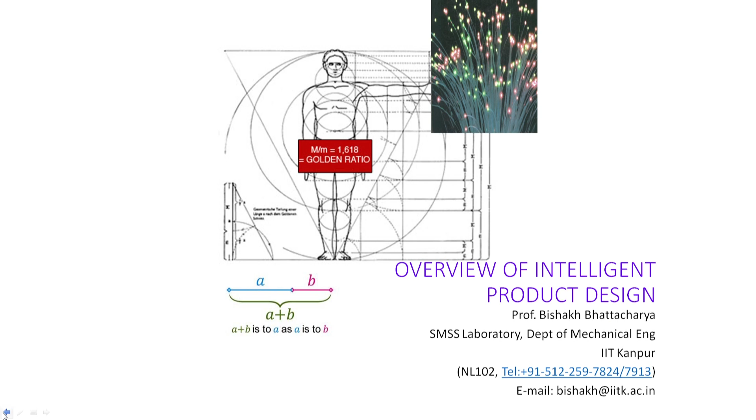Now, in this particular talk and a following talk also, we will give you some examples of such intelligent product design. Okay? And the very first in this direction will be in terms of a particular intelligent system called robots.

Okay? So, we had a dream long ago that animals, birds and human like creatures will be created by us just like God has created us, and these creatures will follow our directions as if we are their gods. This concept is there in humanity for a very long time.

Near about 350 before Christ, Archytas of Tarentum built an automatic dove. This is the sketch that is available today of this automatic dove that can flap in the air and perch from place to place. Though we do not know whether he was successful or not, the design looks feasible, and the only question is how did he power it?

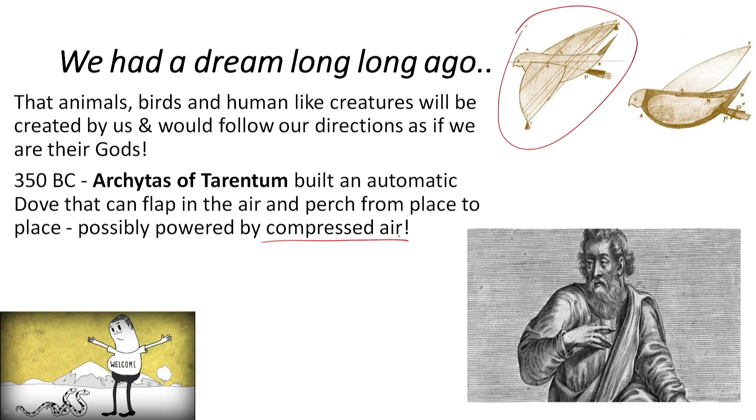We guess that possibly it was powered by compressed air. Compressed air, we should not underestimate the power of it. I will later on talk about at least one system that we are designing today out of compressed air. So, this was more or less the dream of the people in the beginning.

Now, it took more than 1000 years to come to some sort of a realistic situation, where around 1495 Leonardo da Vinci exhibited the first mechanical humanoid robot based on cables, pulleys and gears. You can see what goes inside.

So, you can see the cables here and you can see the pulleys here. These things are important for us. Keep in mind, we will be later on using all these things, and also we have some sort of a geared system maybe here. Okay. So, all these things together, what would this system be able to do?

Well, it would be able to sit and stand, it would be able to lift its helmet partly, and if needed it would be able to beat the drums. So, clearly Da Vinci had in his mind both entertainment as well as defense. So, that was this sort of system.

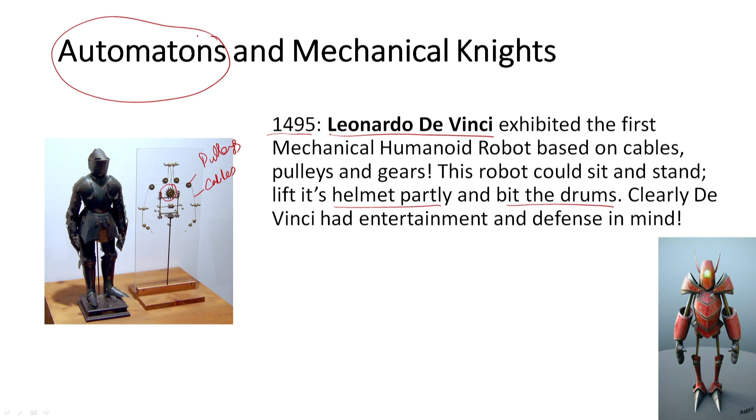Then people started to give a name to it. It is called automaton. An automaton is a system which is mechanically programmed, and depending on that program, it can do a particular fixed type of movement of some limbs or do some kind of work, but the entire thing was 100% mechanical.

Now, the beginning of the 18th century saw the pinnacle, the peak of this mechanical design, because that was the time when persons like Vaucanson had been able to design a fully functional flute player, and even a very interesting duck, very famous as Vaucanson's duck, because this automaton is completely bio inspired.

She could splash in a pool, she could flap her wings, and if you feed this duck some grains, it will defecate in the form of silver pellets. So, this was clearly for entertainment. Now, of course, the field did not remain limited to entertainment.

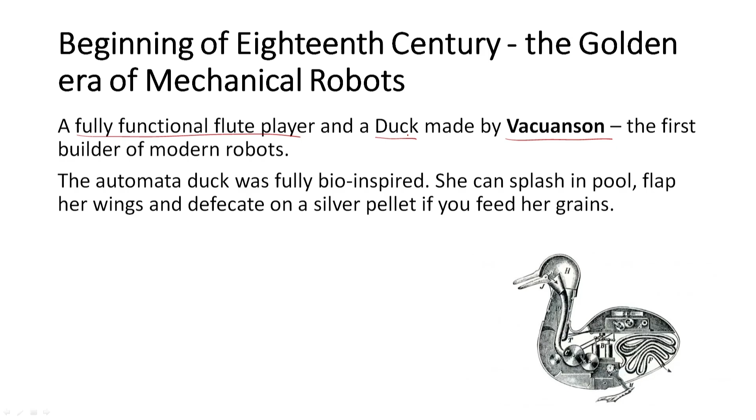For industrial usage, we have to jump now from toys and entertainment to manufacturing, but that took maybe around 70 to 80 more years, and by 1950, as automation steadily progressed with the progress of electric motors and generators,

we started getting newer types of manipulators. Joseph Engelberger, whom we call the father of modern robots, developed the robot called Unimate for General Motors. Unimate was used by General Motors, Nokia and Kawasaki as a manufacturing aid. The GM robot could weld and assemble cars at the rate of 110 cars per hour.

A great achievement. Imagine how many human beings would be required to assemble 110 cars per hour. So, it could save a lot of manpower. Not only that, this hand later on could also play golf, pour beer and conduct an orchestra.

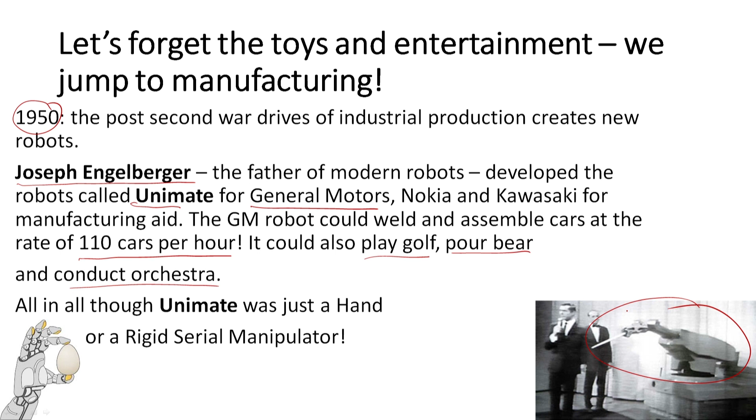So, all through simple hand-like manipulators, and this is nothing but an example of a rigid serial manipulator system. Now, from there we go to 1972, to Waseda University. This university in Japan is credited with building the world's first modern humanoid robot, and it is called Wabot-2. This robot could walk and communicate with people in Japanese, pick objects from one place and keep them in another place. Later, it also could read and play music.

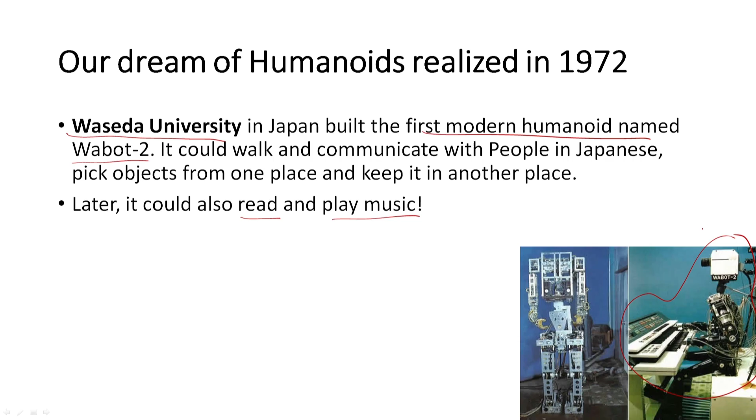So, that is the Wabot-2 robot, as you can see, playing music. So, this was steadily our improvement towards the development of more and more intelligent systems. In that direction, of course, Wabot-2 was not very anthropomorphic, which means it was not very human-like. A more human-like product was Asimo, and Asimo actually means literally dancing humanoid. Honda introduced this robot, and it is famous for its mobility. Asimo can jump the stairs, dance and avoid all obstacles in its path.

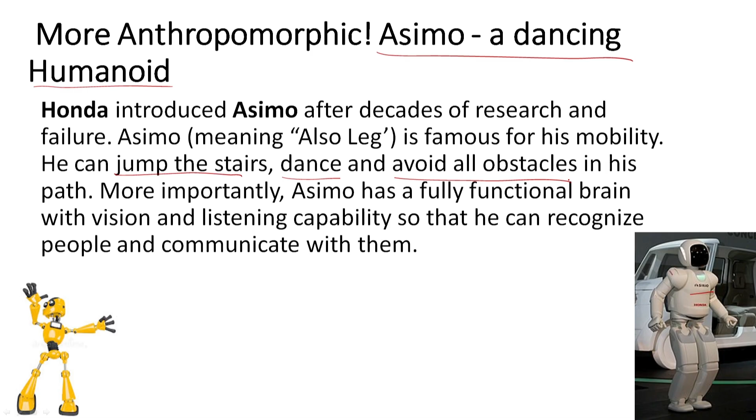More importantly, Asimo has a fully functional brain with vision and listening capability, so that it can recognize people and communicate with them. Now, 2006, if we go fast forward, we get a wonderful intelligent system, a robot called NAO, which is a generic humanoid which even you can program. We program it in our laboratory. So, Aldebaran Robotics created this NAO robot, which is a programmable humanoid robot used for research, and now for the first time computers have a body.

You can program NAO to walk, talk, perform any complex movements. NAO has 25 degrees of freedom, and compare it with us, it is about 40 degrees of freedom. So, you can say that it is quite versatile in terms of its movement, and today it is available in many countries, helping researchers, helping autistic children and elderly people. So, this is the NAO. Okay. So, that is another development.

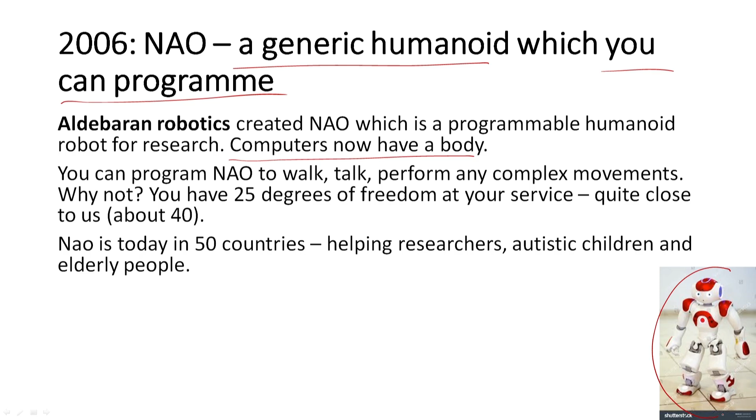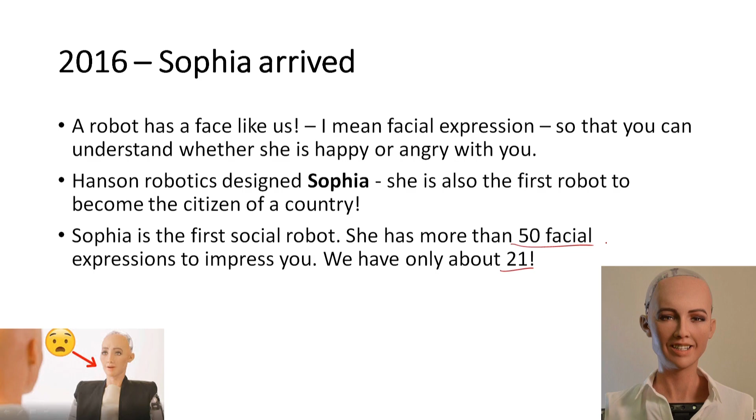2016, something more human-like appeared. This is Sophia. In fact, Sophia is the first robot who got citizenship of a country. Now, Sophia has much more facial expression than us. Possibly we have about 21 facial expressions, the muscles that move our face, whereas Sophia has about 50 facial expressions. So, that is how it is much more interactive in nature.

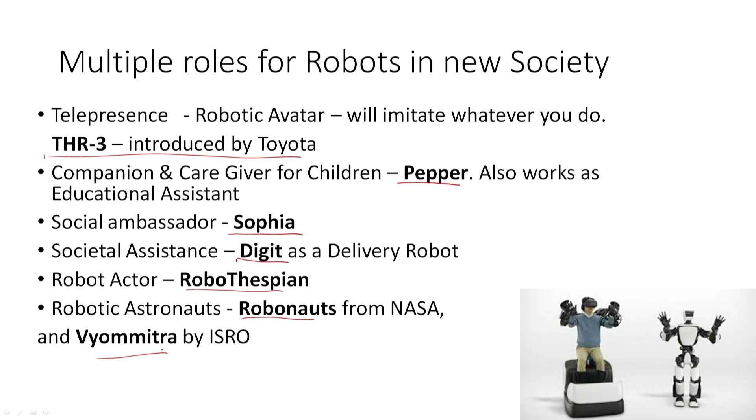Now, today there are multiple robots with multiple roles in our society, like this robotic avatar THR3, which is introduced by Toyota. It is used for telepresence. Then the companion and caregiver for children, a robot called Pepper. It also works as an education assistant. Social ambassador robot, I told you already, Sophia. Social assistants like Digit as a delivery robot. Then robot actor RoboThespian, robotic astronauts like Robonaut from NASA or Vyommitra by ISRO. So, there is a whole group of robots for different types of functionalities today.

Important thing for us to know is that robots are not the only intelligent autonomous system. IAS, keep the full form in mind, because it is related directly to our course: intelligent autonomous system. Okay. So, this is not the IAS that you know, not the Indian Administrative Service, but intelligent autonomous system. Now, in this category, robots are not the only thing. For example, all the unmanned air vehicles, unmanned ground vehicles, or underwater vehicles, they are all part of this IAS system. Hyperloop, I will show that example, is an autonomous transportation system.

Then there are Da Vinci-like surgical platforms, that is also an autonomous system. Then we have this autonomous tactical swarm system Atlas, which is used for defense purposes. Then we have the AI-driven Northrop Grumman X-47B, a completely autonomous aircraft for defense purposes. Play and companionship, such as Sony's Aibo, an autonomous robot dog, or Anki's Cozmo. And also we have AI in VR games, virtual reality games like Half-Life: Alyx.

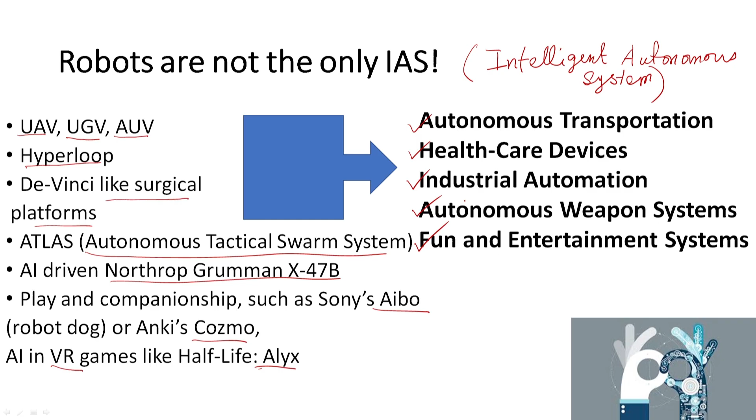So, today if you look at it, these intelligent systems are there in autonomous transportation, in healthcare devices, in industrial automation, of course, for manufacturing, then autonomous weapon systems for defense and offense, and also for fun and entertainment systems. So, there is a whole range of products where you will need this kind of intelligence to be embedded, and they all come under the gamut of intelligent autonomous systems. So, then the very relevant question for our course is: what is intelligence?

How do we define intelligence? Intelligence is the ability to act appropriately, that is important, to act appropriately in an uncertain environment. What is this appropriate action? Appropriate action is that which increases the probability of success. And what is success? Success is nothing but the achievement of behavioral goals.

So, the more you achieve the behavioral goals, the goals for which a product is designed, the more successful is the product. And the more successful it is, not only in an environment for which it is generally designed, but in an environment which is uncertain.

Like I have this watch here, and I know it is designed to work inside this room or in a normal condition, but if I go deep inside a swimming pool, it is not designed for that environment, it is a new environment. So, in such an uncertain environment, if it is still working when I come out, that means this watch is intelligent. So, like that you have to design systems which can keep themselves ready for any uncertain environment.

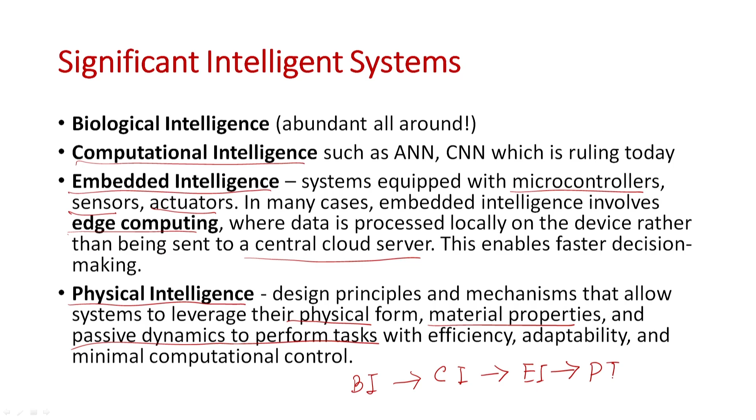Remember in the last class I talked about a passive walking robot designed at Stanford. This one has physical intelligence, because it can take leverage from its physical form, from material properties and passive dynamics to perform tasks with efficiency, adaptability and minimum computational control, so that you actually reduce the computational part. This is the goal towards which we are progressing. There was a time when there was only BI, today we are in CI, from CI we will go to EI, and from EI we are rapidly going towards futuristic PI, physical intelligence.

Now, I will give you some examples of such systems, okay. Particularly I will go up to EI systems. So, one such system that has been developed in our laboratory is called autonomous robot for crop monitoring and localized pest neutralization. So, what does it mean? It means you can see here that these are basically potato fields. Okay. So, these are potato fields in which we have this autonomous robot.

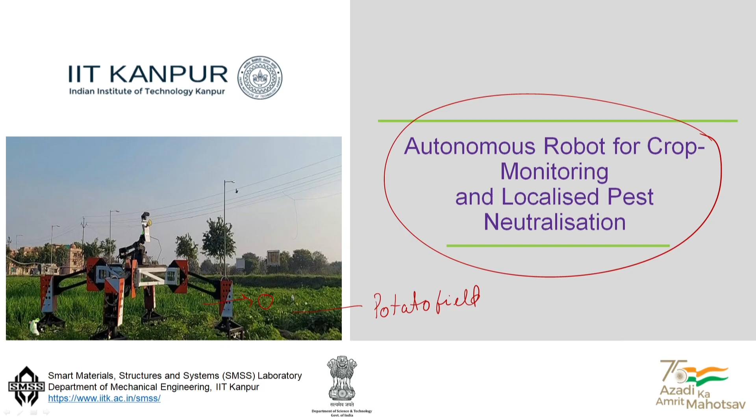What it does is that it monitors the health of these potato plants, and also it finds out that, let us say, there is a specific region where some kind of a pest has appeared. So, you should not apply the pesticides all over the field, because pesticides are carcinogenic. So, it will look into it with its cameras, the robot will travel there and apply the pesticide specifically at that particular point. So, that is the way this system is going to work.

So, you can see here how this system is developed. Okay. So, it has a chassis, for example, which has all these manipulator type of things, and then it has an adjustable arm configuration, so that with the soil up and down, it has that physical intelligence to take care of it. It has suspension mounts, so that the vibrations would not affect it, and then it has the robotic arms attached here that can apply this particular type of pesticides.

So, the range of such a system is designed in a way that it does not go a long distance, but up to 5 km with a speed of about 3 km per hour, with a lithium ion battery system. Temperature range is 20 to 45 degrees. So, it is not a very uncertain environment, and 80 kg is the weight of the system, and it is equipped with cameras like the Intel RealSense depth camera. It has Wi-Fi communication and robot operating system.

And you can see here that it has acquired the knowledge of different types of diseases of a potato field, like potato early blight, potato late blight, and tomato field also, tomato early blight, tomato late blight. It has understood them, and then it works in all these different types of fields and applies the pesticides. So, let me see if I can show you some of these videos at this point. Okay, so in a few of these videos you would be able to see how it is moving and applying such pesticides.

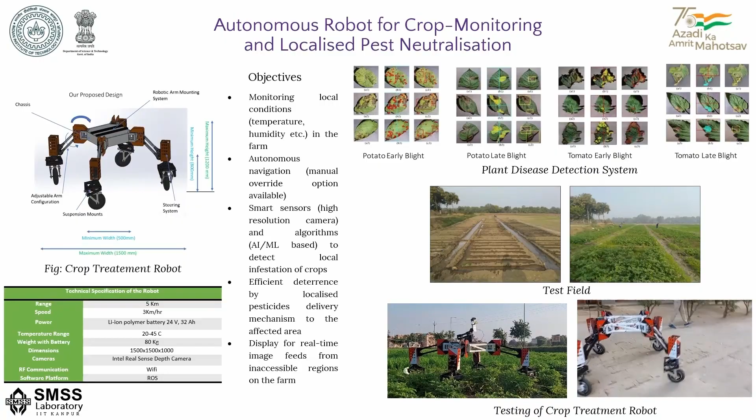Now, I will come to the other variants of such a system. Another variant is the plant disease investigator, and it works on the field itself, closer to the ground. So, it has a different type of movement system, a belt driven system, and its major role is to identify these diseases that I have talked about.

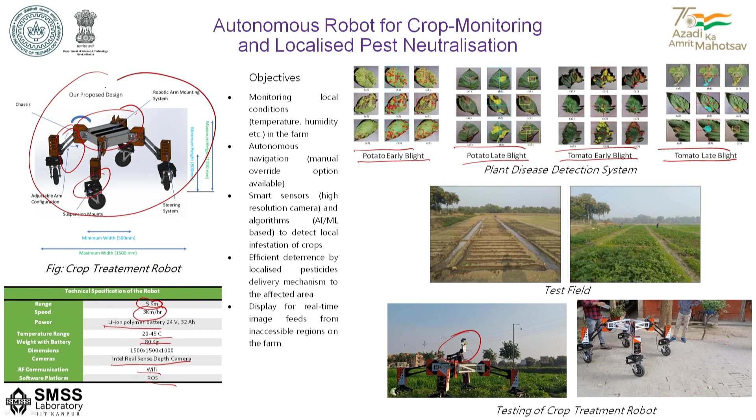For all these diseases, it takes photographs, tries to identify them, and feeds that knowledge into the main robot. So, the main robot has to work in tandem with this type of smaller robot which works closer to the ground, because otherwise you will not get such information. And also there is an environmental observator that moves along these lines all over the field and gets different types of data.

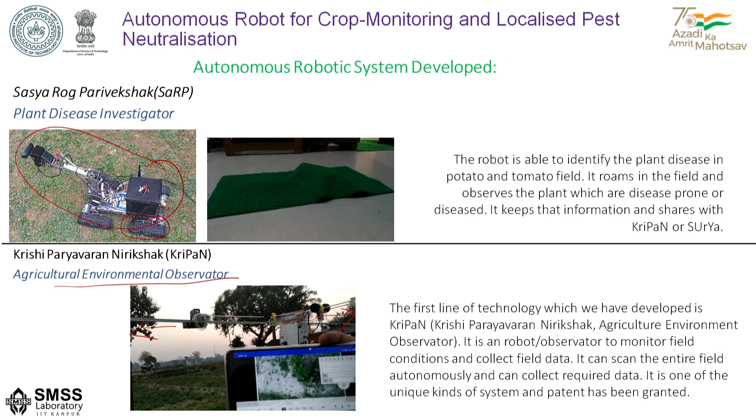I will show you what type of data we can record in such a system. So, you can record data like light intensity, air temperature, air moisture, soil temperature, soil moisture, as well as visual images. So, these multiple parameters at different conditions you have to acquire. So, you have to have a multimodal data acquisition system in order to have the embedded intelligence in such a system.

So, this is one such example of a project that we have done, which was sponsored by the Department of Science and Technology, okay, at IIT Kanpur. Now, I will talk about another embedded intelligence system.

This is the design and development of a substation inspection robot. You can see here this works in an electrical substation unit, and here you can see the design of the robot, which is based on a rocker bogie mechanism. You can see the pan tilt mechanism here for the camera, the thermal camera, the RGB visual camera unit.

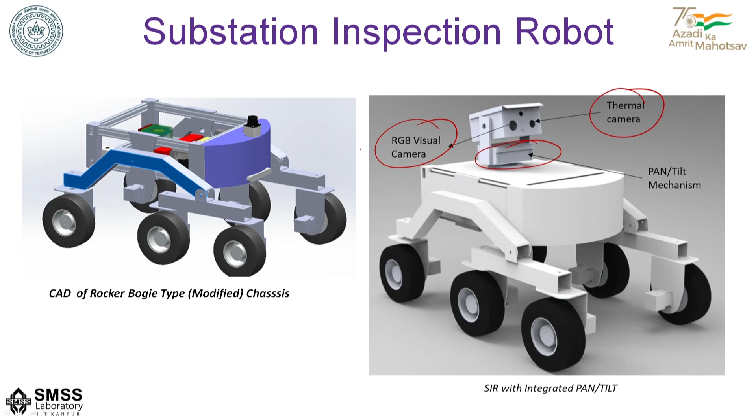So, multiple sensors will be needed for its movement, and with these you can see that this is the prototype of the system in which the driving power is coming from the motors, and it has additional systems like an emergency stop system. Then it has the MCB corresponding to it.

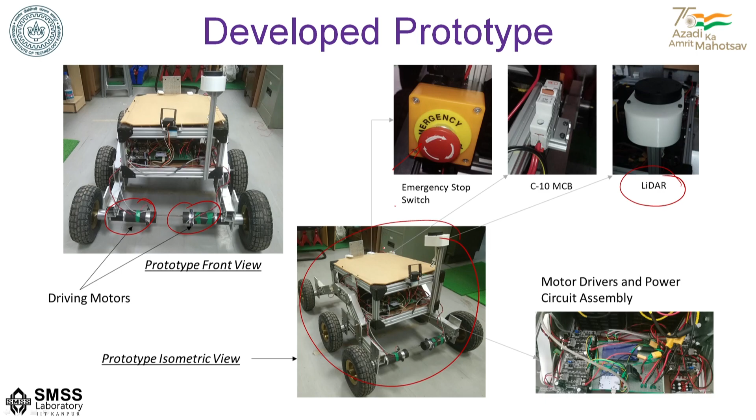It has a LiDAR system which actually tells it about the path and the obstructions ahead, and this is the prototype isometric view of such a system that we have developed along with the motor drivers and the power circuit assembly. So, once you have all these sensors in it like thermal camera, pan tilt zoom camera,

and then the ZED stereo cam. Thermal camera is required because you need to know in a substation if there is electric insulation failing, then there will be hot spots. So, you need to know about the hot spots, the thermal camera is going to record it. Pan tilt zoom camera is going to record the different types of dial gauges or different types of areas of failure. Stereo cam is going to record the path, and LiDAR also is going to record the obstacles present in the path, and you also have the microprocessor.

This is the brain of the system, which is an NVIDIA Orin system. So, all these systems together create an example of an embedded intelligence. So, you can see that it is in a rocker bogie action against some obstacles like these, and gravel track work, rocker bogie actions, all these different types you are able to see in the test run.

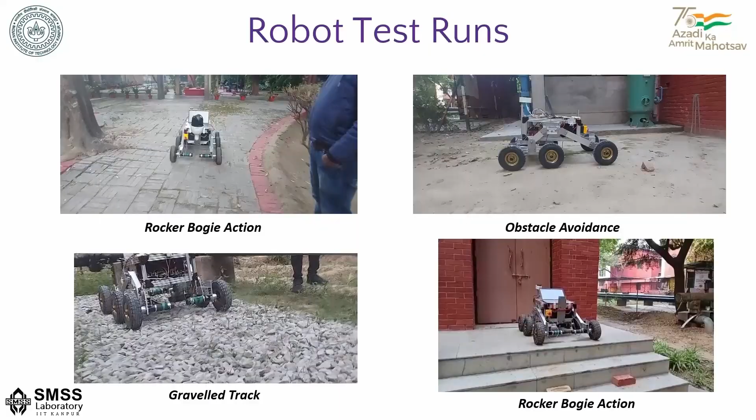Now, one of the intelligence that this system is having is actually object and gauge detection. So, using artificial intelligence and machine learning, it first of all detects wherever the gauges are, and if there is a gauge there, like let us say this is a gauge, it identifies the type of the gauge, and differentiates between gauge 1, gauge 2, etc. And then converts this reading, the reading that you can see here, into a digital reading. Okay. So, that is the purpose of it.

So, it trained itself using many images, close to 5,000 images, and then it is able to detect the objects, detect the gauge, and determine the readings of these analog gauges, and then transfer them into digital data. So, that is the function that it has to work on.

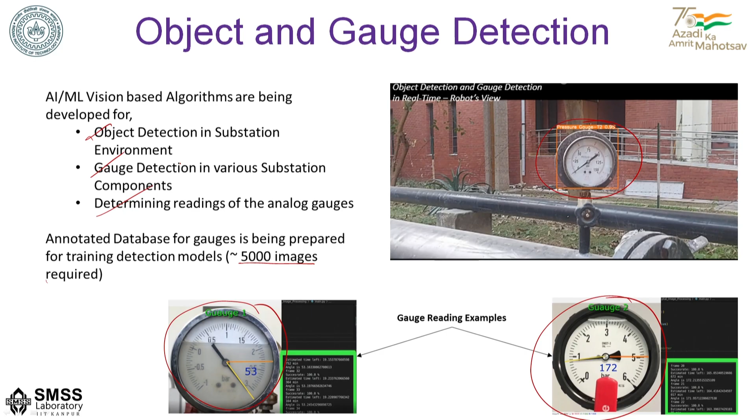Now, I come to the point that these are some of the things that have been already done today. Okay. In this course, we will be precisely able to know how you will be doing such a thing, and how the future intelligent autonomous system will be built. So, in order to know that, you have to first see what goes in an ASIMO robot.

Like the Honda engineers created the ASIMO robot, which has 34 degrees of freedom that help it walk and perform tasks much like a human being, and by using lightweight materials like a magnesium alloy structure combined with powerful computers and 34 servo motors throughout its body, it helps the ASIMO to move very smoothly.

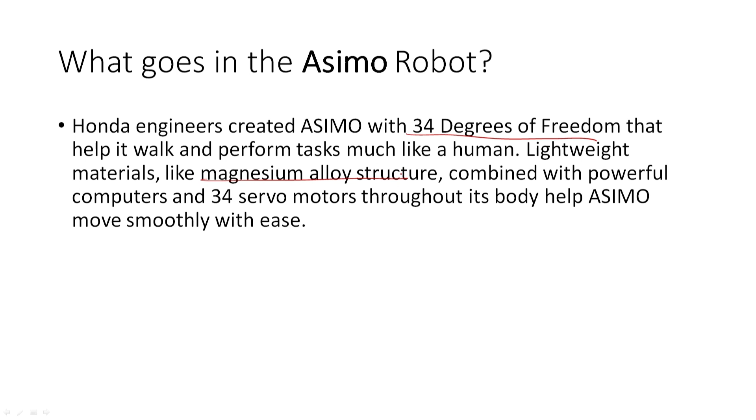However, if you look at the specification of ASIMO, you will understand what its energy efficiency is. It is about 3.23, that is the energetic cost of transport. Compare it with us, which is 0.20, and that famous Cornell biped, which was very passive and of course did not have this kind of functionality, was also very close, at 0.20.

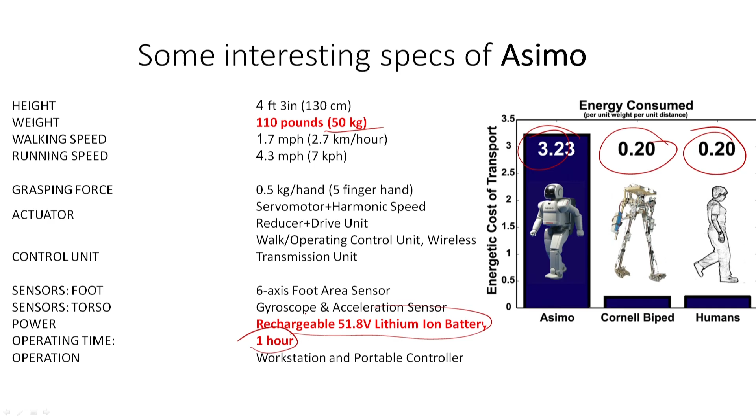But ASIMO, with all the advanced functionalities like us, is a terrible failure in terms of energy efficiency or efficient utilization of energy, because with its 50 kg weight, it can only run for about 1 hour with a rechargeable 51.8 volt lithium ion battery. So, that is something that we need to avoid in tomorrow's systems. How do we do it? How to make IAS energy efficient?

Well, one important thing, as I told you in the beginning, is that the days of purely computational intelligence are really numbered, because you have terrible computational cost, the weight of the computer, and then the cooling that you have to give. So, part of the computation has to be morphological computation. That means the structures and materials will do some of the tasks on their own, which will make life much easier. Okay? I can give you a simple example of it.

See, when we walk on any terrain, you really do not always need to watch where you are walking. Your feet themselves know that this is a new surface, and accordingly adjust the spread of the toes, etc., so that essentially you save yourself from those computational tasks. Unless that area is very, very slippery, so that you know you have to change your configuration from two limbs to four, I mean hands and legs together; if you take such cases apart, in most usual cases it is morphological computation that saves us from computational burden.

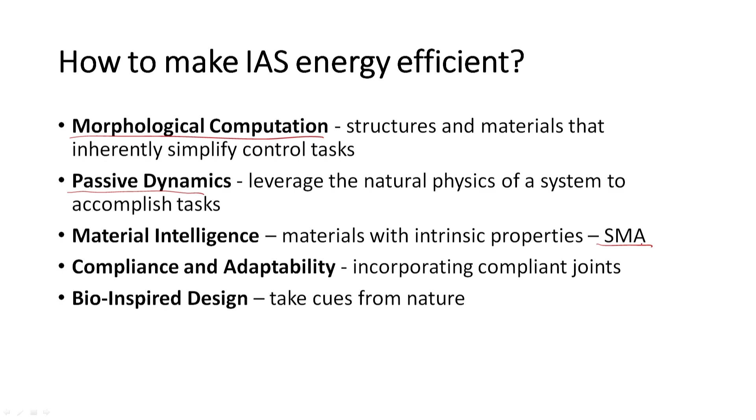And then passive dynamics, as I told you, leverages the natural physics of a system; material intelligence uses smart materials, materials with intrinsic properties like shape memory alloy; compliance and adaptability, so that you can incorporate compliant joints in the system; and bio-inspired design above everything, that is, take cues, take ideas from nature and implement them in a system. That is what will make the system cost efficient.

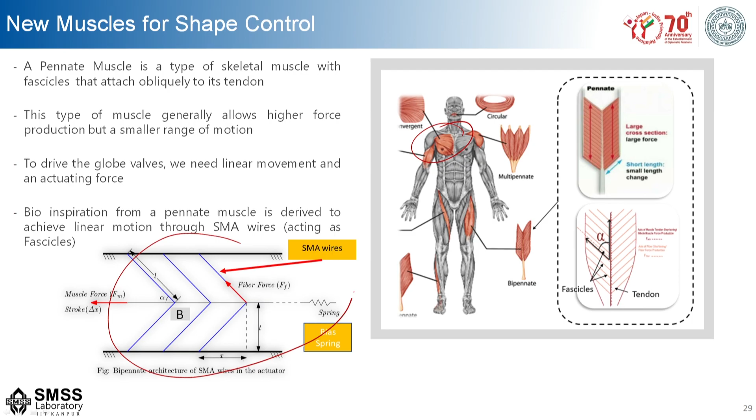Some examples of such a system, which I will talk about in much more detail in the course, are these muscles that can be simulated using shape memory alloy wires. We have developed it for exosuits and exoskeleton types of work, where you can get a tremendous amount of weight savings if you use this technology.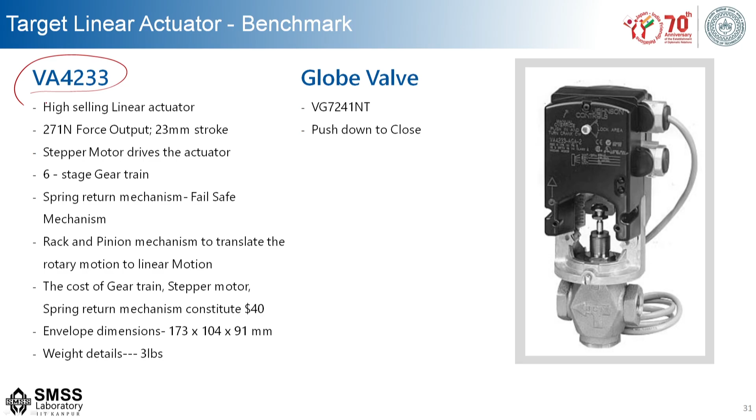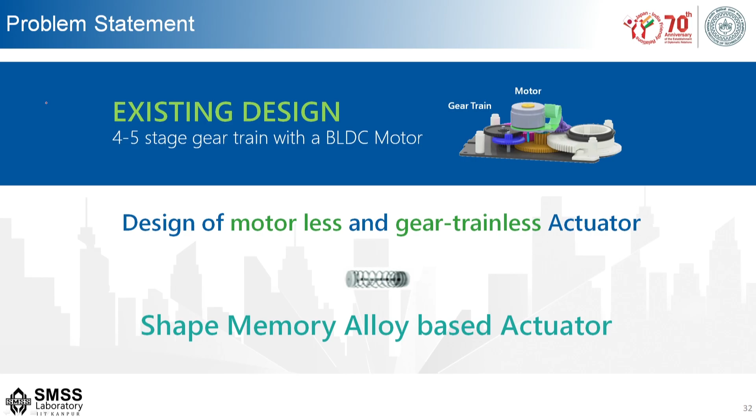This is a case where we have used this and compared it with a particular type of actuator called VA4233. This was the existing design, and it becomes a motorless and gear-trainless actuator if I use the SMA, which is bio-inspired. I will talk about the SMA details later on, like what actually gives this property to the SMA. I am just giving you the overview of it.

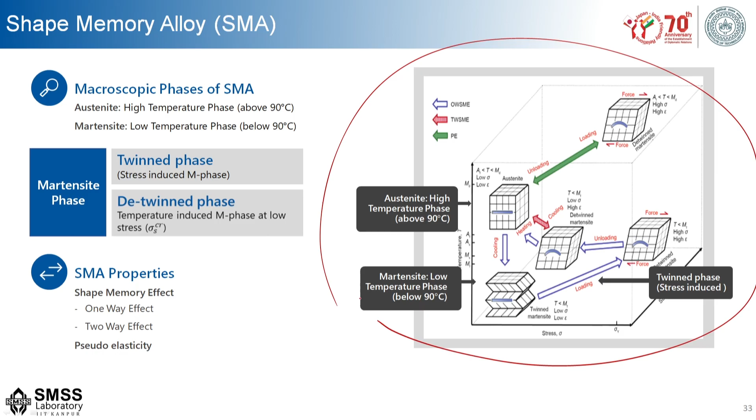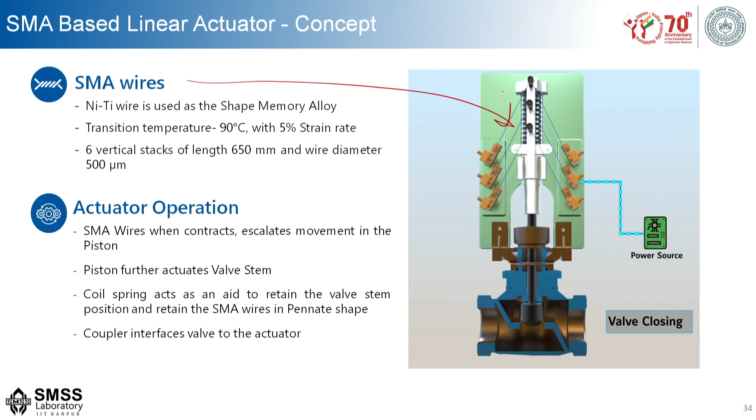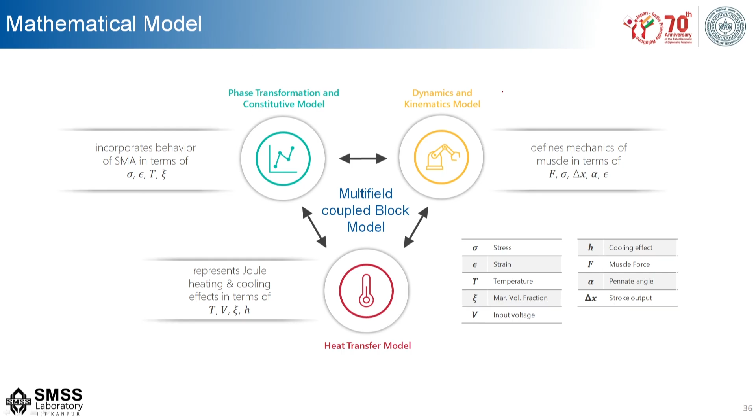We have used such SMA wires in this bipennate configuration as an actuator, and you can see this is the bipennate actuator configuration, in which we have utilized such a system first in 2D, which involves many different types of fields that have to work together to create this action. And then this is a complete three-dimensional system in which we have the bipennate actuation.

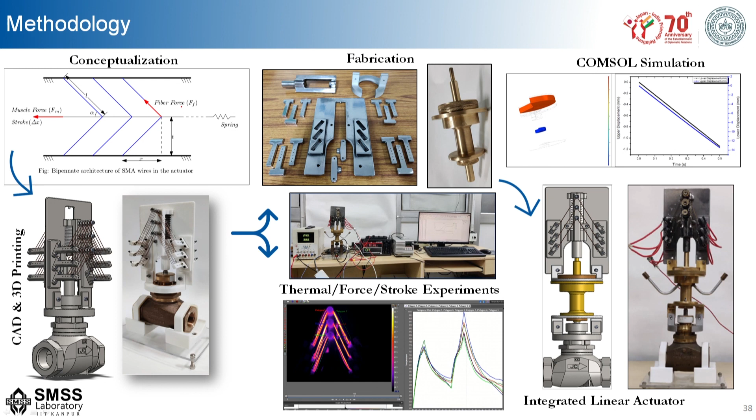You see the conceptual visualization of the system to give you an idea of what an intelligent system is, and there is a video there that you would be able to see, and this is how this actuator is moving, with a force greater than 200 Newtons.

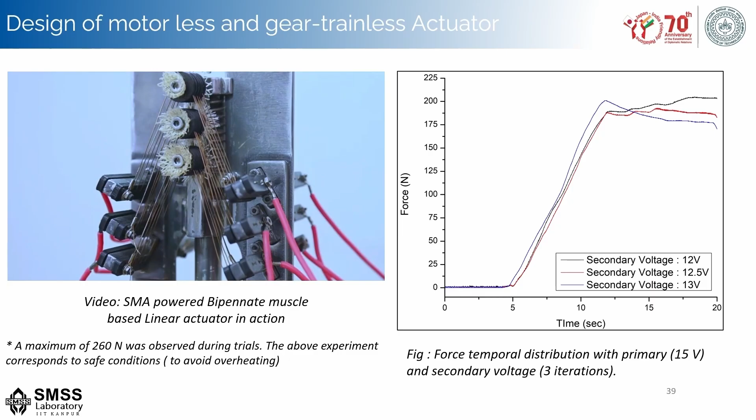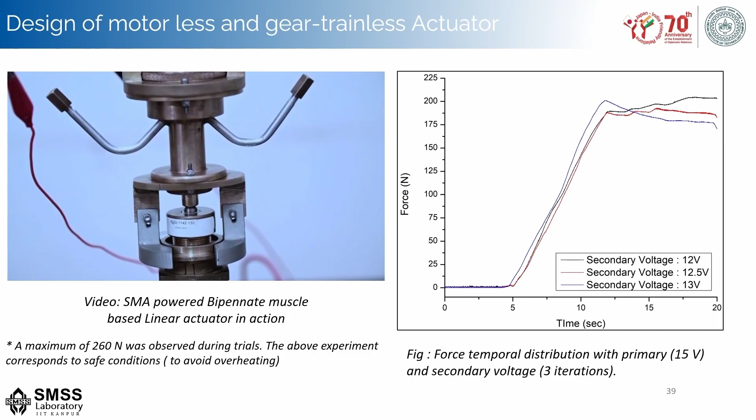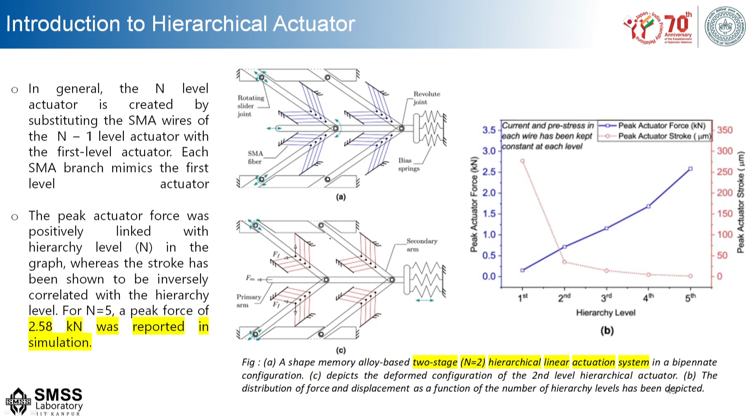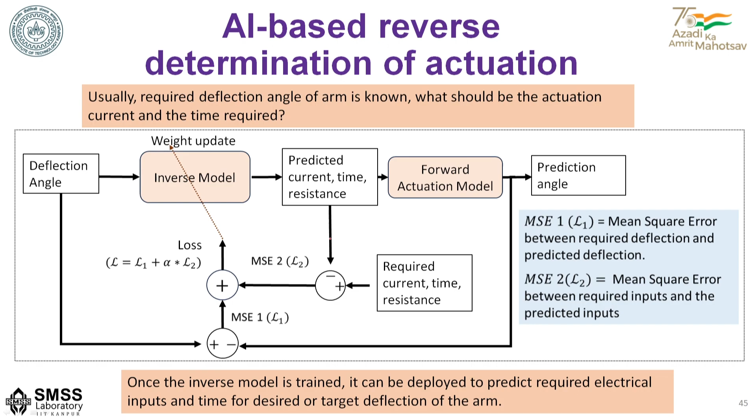And you see what a tremendous weight saving, 67% with the help of this system, and of course cost savings of 32%. You can further make it spring-based to make it more efficient. You can also make it hierarchical to increase the actuation force further, and of course you can implement an AI-based system to make it more intelligent in terms of the firing power and both forward and reverse determination of actuation in such a system.

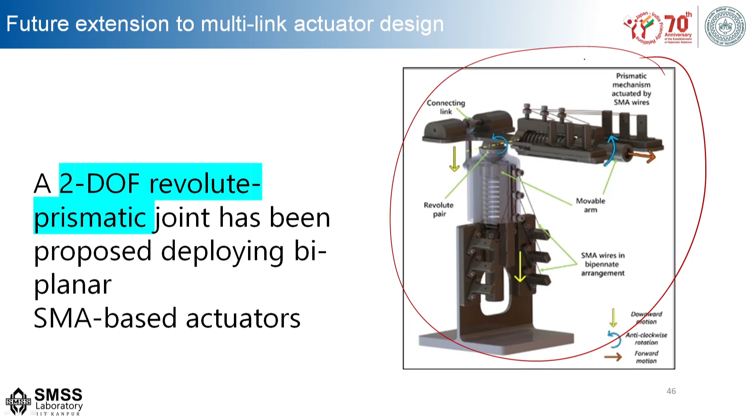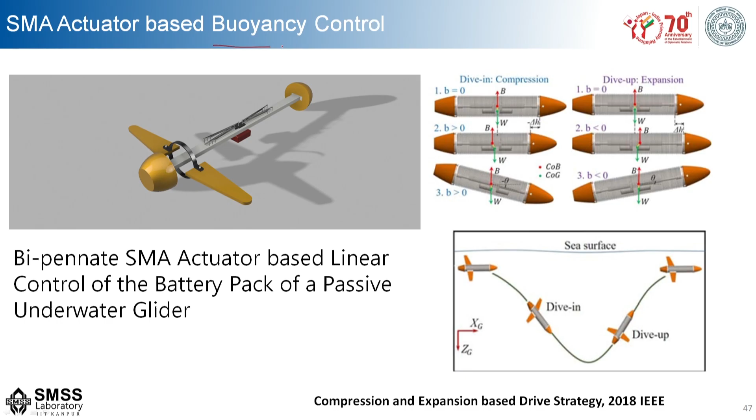Tomorrow's actuators and robotic links will be built using such a system. This is just a visualization of the system, and you can utilize it not only for arms but also for buoyancy-controlled vehicles, and even for exosuits. So, it will have a huge research impact. I am just showing you some of these papers that detail how we have designed such a system.

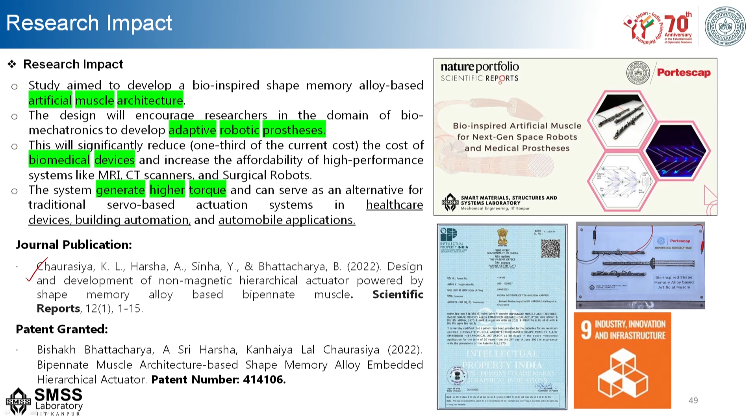So, this is where we end today, and in the next lecture I will give you some more overview of intelligent system design. Thank you.